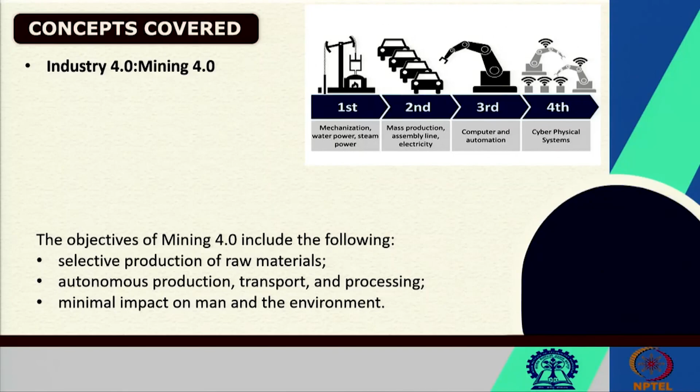Now when we talk about this Industry 4.0, which is a buzzword these days, everybody is talking about it, and I assume that as an engineering student you have already got sufficient information about what is this Industry 4.0. When we talk Industry 4.0, it is exactly an abbreviation, or in a form we are telling about Industrial Revolution 4.0. All of you know that the industrial revolution started with the introduction of the steam engine about 200 years ago.

After the development of the steam engine, mechanization came and many operations started getting mechanized, the first of which was the textile industry. Then the industrial revolution came to Europe, and then to all English and Europe dominated other countries.

After that, Industrial Revolution 2 came with the introduction of electricity, electrical power, and electrical drive, and with that electrical drive, this industrial revolution brought mass production.

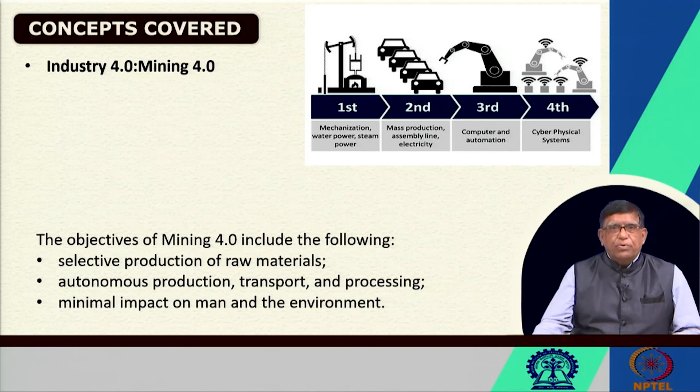Industry 4.0 is already operating in our production systems, our machinery maintenance system, our automation in transport and processing, and the impact of man and our environment by mining can be reduced by incorporation of this Industry 4.0 as mining 4.0. Today, mining 4.0 involves a lot of mining automation.

This mining is exactly now where it is operations for managing a different type of supply chain, from the raw materials to the mining industry, to the supply of the product to different industries, and then the transportation system, getting the explosives to blast. Then it requires a lot of unit operations in mining. Those who are studying mining engineering know that there are different unit operations, but for better control we require securely visualizing the whole enterprise and its operations.

Now when you want all these operations monitored and brought together to a control room, there come the applications of information technology, communication engineering, and data; data analysis becomes part and parcel of modern mining, and that is where your Industry 4.0 mining automation comes in. So in this lecture I will not be telling you the technology involved in Industry 4.0, but, from a user's perspective, what exactly you should know.

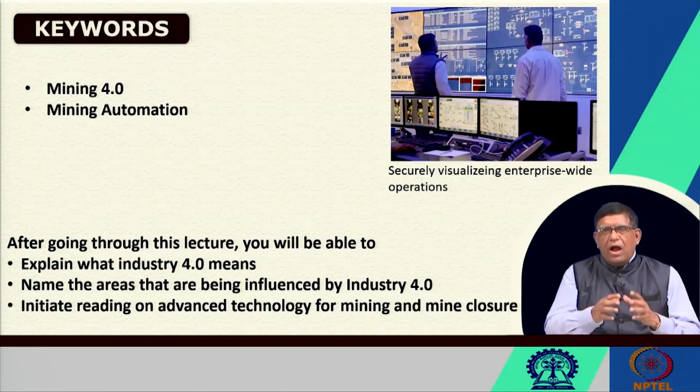So you should be able to name at least the areas that are being influenced by Industry 4.0 in mining, and you should start reading on advanced technology for mining and mine closure. That is the objective of this, so that you develop an interest, since this particular area will be transforming our mining industry and mine closure operations. So what is Industry 4.0? I have already told you; now a little bit more on it.

It is a cyber physical system. What is a cyber physical system? It is particularly where automation is brought in, where different physical things are remotely connected, they can communicate amongst themselves, and they have the Internet of Things to start the control by taking decisions by themselves.

So this cyber physical system works with a lot of sensors, and they are interpreting the data. By using artificial intelligence, decision making becomes inbuilt, so that it can actuate different controlling functions, and those functions can be self-optimized, self-configured, self-diagnostic. If a system is running, there could be a problem. Before the problem comes, the data collected by different sensors is analyzed by the inbuilt intelligence, or intelligence which is continuously formed, and after that it will control the operations.

And for doing that, nowadays a lot of other associated technologies are being introduced, like drones, which are making all our remote sensing tools more productive. With the use of drones, we can do the total mine mapping very quickly, 3D imaging, and then advanced engineering and robotics. These are being incorporated.

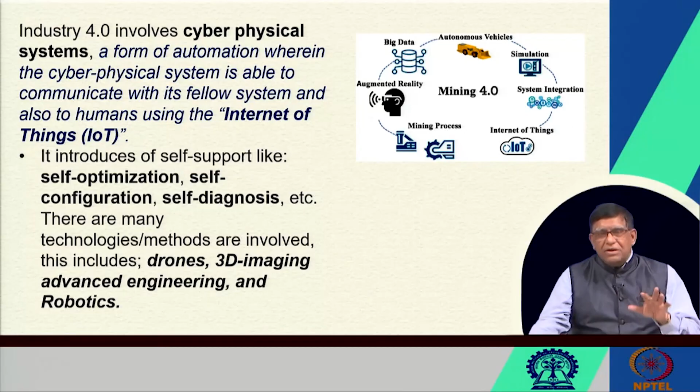You may be hearing some terms like digital twin. When it is maintaining things, we can create a digital twin on the screen, and then for whatever the operations, the expert can be sitting over here, and only one operator or a robot will be there; their controlling knob can be operated from the operator's table. That type of thing has already been brought in, and it will be integrated into a system with the Internet of Things. Then overall everything will be transforming the mining process, and when we do the mining like that, we will be talking about how closure also will take place.

In Sweden, they have done a lot of work. You know that Sweden is famous for the Kiruna underground mines. Near the mines, you may know the Luleå University. At Luleå University, Professor Galler and Professor Uday Kumar have been doing a lot of work on this. They have made a roadmap for the Swedish mining sector, where there will be robotized mining, autonomous mining, mechanized mining and remote production, and how it will be transforming from manual mining.

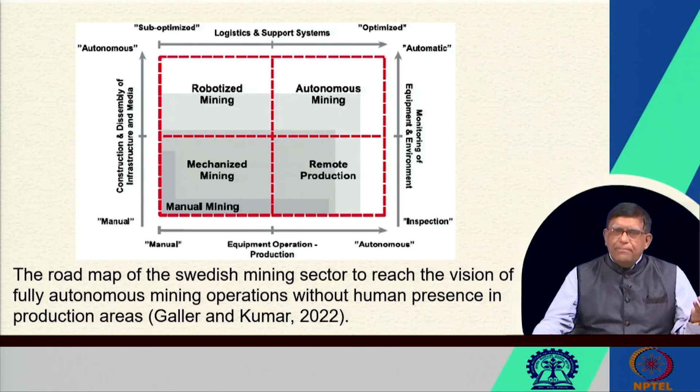At present, wherever we are doing manual mining, many things are manual and sub-optimized, and those sub-optimized manual operations, when going to autonomous with digital technology, will go to an optimized system. In the optimized system, when you go automatic, your equipment and the environment, everything will be inspected, controlled, and operated for the best productivity and safer operations. That is the vision. So when we talk about Mining 4.0, to go from there to the fifth generation, there will be a lot of areas.

There will have to be machine-to-machine communications. Without an operator, the shovel will be working. Without an operator, the dumper will be working. When the excavator is excavating, it will communicate with the dumper through different types of gadgets and information flow. You will know in which position exactly the dumper has to stand, so that it takes the minimum time to load there. So it is not only the loading, it will also be controlling the cycle time.

That's why with machine-to-machine communication in mining, different unit operations will be done in a sequence. Some work will be sequential, some work will be parallel. The parallel and sequential operations will be optimized through this machine-to-machine communication, which will use locational information from GPS, the global positioning system, and transmissions using radio frequency, so information will go from one machine to another. Every machine will have its transmitter and receiving sections.

A communication network will take place, and within the machines many sensors will tell whether the fuel system is working okay, the braking system is working okay, the steering system is working okay. If any untoward incident takes place, the warning will go, not only machine to machine, but also to the control room. And that has been done with ruggedized sensors. In the mining environment, with temperature, dust, water, all that, the sensors have to work, and that's why developments in instrumentation, electronics and mechatronics will be used in those sensors, and the data collected will have to be analyzed using artificial intelligence.

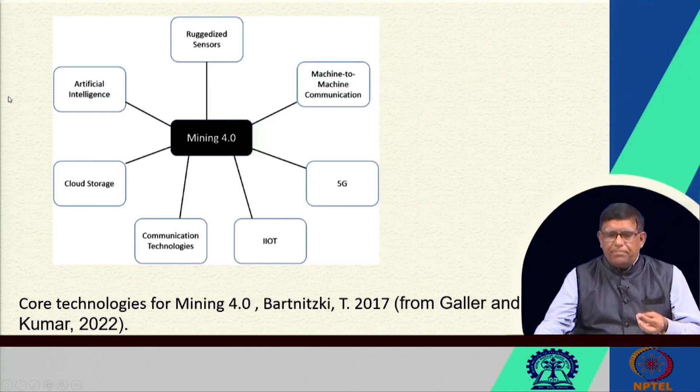You will be using cloud, so how the information will be communicated and shared, that data informatics will be used over here. And this ICT, that is the information technology and the communication technology, is the main thing by which your industrial Internet of Things will be coming up. And when this is put, then our whole operation takes place.

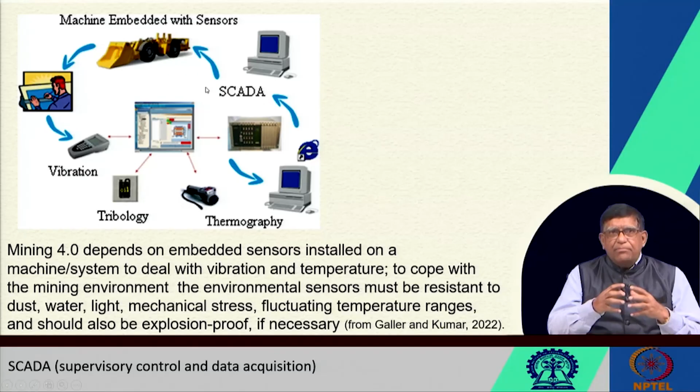Now once you know about this, then there will be machine embedded sensors, and this supervisory control and data acquisition, SCADA, is another thing which revolutionized our industry 3.0 to industry 4.0. During this transition period, the SCADA system of software and hardware made a lot of differences. And in mining, in a number of problems, and in the maintenance sectors, vibration, tribology, thermography, all these things are put there, and then these embedded sensors are used for controlling the whole operations.

So basically, when you are going towards industry 4.0 in mining, we know what field instrumentation is required, what field controllers are required, how the human machine interface will be there, and from the human machine interface, how the machine to machine interface will be developed, and then the network connectivity, whether we are doing it by direct connections or by remote connections, by wireless connections, then how this information is archived, where it is put, how it is processed, all these things will be taken up.

So if any one of you is interested, if you have got a knack to learn these things, you should start doing a few small activities. Don't think of going one day to industry 5.0. For that, at least sit with your electronics gadgets and electronic instrumentation, and start developing a few things.

At least try to see whether you can make the coffee making machines in your hostel remotely start operating when you put your bicycle in your cycle stand. It is a simple thing. You can easily instrument your coffee making machines, and then with your cycle stand, a number of friends together can put their room numbers there, and then the coffee maker, if it is there in your room, will start working.

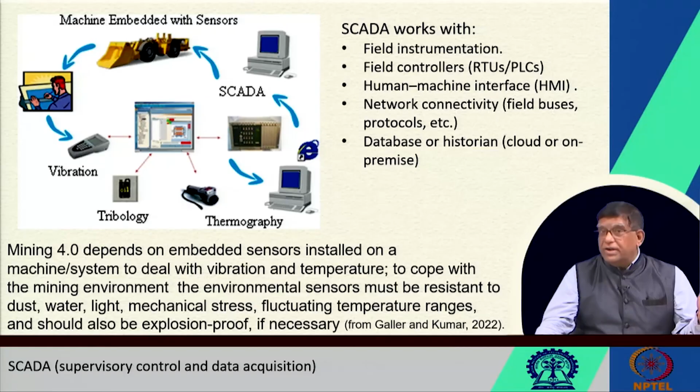Now this industry 4.0 technology for mining will be giving different types of things. I will not tell about what the biomechanical supports or different wearable things coming up today are, but as an example, if you have some wearable sensors on your body and you go into an underground mine, if there is no proper illumination, you can have infrared sensors to see things, so even in darkness you can get visibility, and you will be monitored from the surface wherever and whenever you are working.

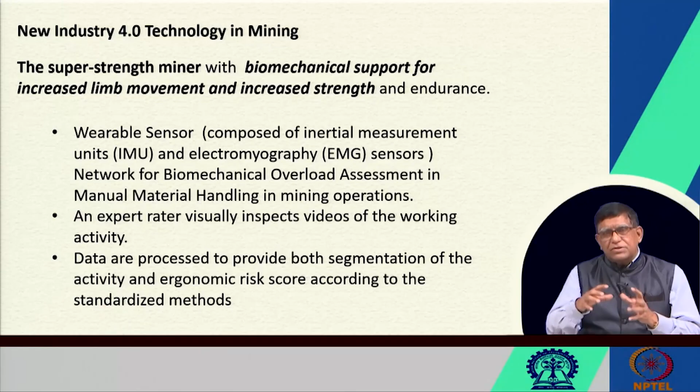Now suppose you want to lift certain machines and parts, at that time you can have additional arms which will give you extra strength. When you have to climb, say, a ladder in an underground mine in a very small space, you can have biomechanical supports on your legs so that your own ligaments and flesh are not getting tensed. So those types of devices can be there, and because of your wearable sensors and those gadgets, every location of the miner can be looked into.

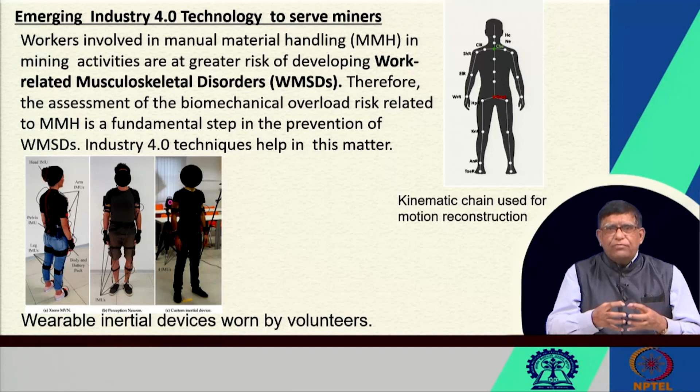So there is a lot of research going on in this. Miner safety is a very, very important thing, and miners can be monitored by putting sensors on their body, and from there a warning can be given if you are doing some wrong jobs and things like that. So these are some of the areas, sensor technology, health, biomechanics. These are going on, and they will have to be integrated for the mining operations. Whatever you do in mining operations can also be useful for your underground mine closure operations.

At the mine closing stage, your mining is done, you will have to take out the instruments and all that. At that time there is less ventilation, some of the area may not have been maintained for a long time, so there will be more risk. That's why you will have to get more automation over there. You cannot make many people go over there. If you are sending one person, make him fully gadgeted, so that he can give all the information.

At the same time he is safe, so that when he is approaching a gallery where there is methane gas, his wearable sensors will give a signal not to go beyond it, or it can automatically actuate the oxygen mask he is carrying. Say the underground oxygen has come down; the wearable gadgets will detect it, a mask may come up automatically, and he will start getting oxygen from the store he is carrying. Different things like that will be necessary when surveying a mine for closure.

So there will be an automated safety system. This is automation of safety, whatever I have said. It is a story I am telling, but you will have to imagine. Whatever new development and new technology comes, what you have studied in basic electronics, basic electrical engineering and basic mechanical engineering is enough. After that it is your job. You only need to imagine, just like J.K. Rowling imagines Harry Potter.

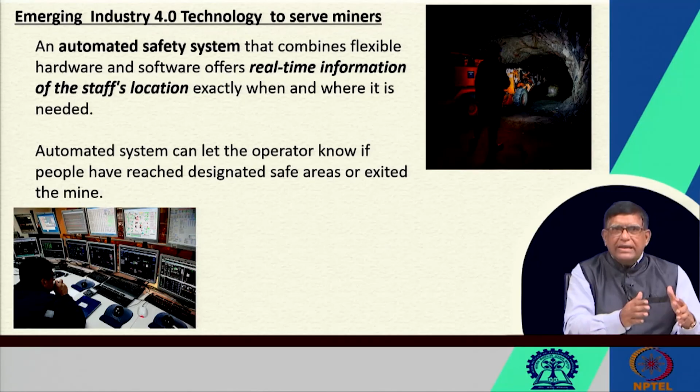Unfortunately, you are not getting exposed to that. But under the new education policy, every mining engineering department will have to have such laboratories, and for that DIY has started. If you have missed it because you are not in the new curriculum, start working with your first year colleagues who have just joined. They are doing DIY; join them, so that in the near future we can develop such laboratories in our departments.

So new Industry 4.0 technology in mining will make life easier, whether for closing or producing. In the heavy machinery erection yard, a lot of new mining activity gets delayed because procured machines do not get erected in time. There exactly Industry 4.0 will help. Similarly, demolition of the mine, where there are a lot of hazards, can be robotized. It will save money. Wherever you can do the job faster, safer, with less manpower, you save money and do less environmental damage. Before the environment gets more damaged, you get system warnings and mitigate by automated means, so the environment is better protected.

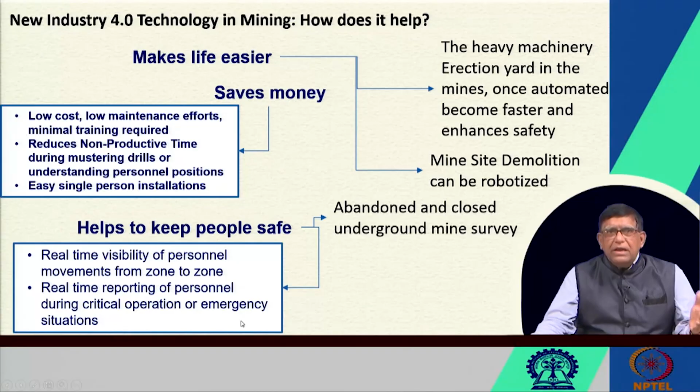And Industry 4.0 will keep you safe and enable you to work better, because wherever a person is, in underground or opencast mines, his location, his condition, everything is monitored, and someone at the top knows it. If you make any mistake, you will get a warning at the same time, so it will enable you to work better.

Similarly, it will give you the information, that is the power, that data when they are collected and then analyzed, and that quickly it is becoming information. How quickly you can convert data into information, then you will be getting powered. So the data analytics people, they do not know what information you require for your area, your industry, your technology. So that is where the power is.

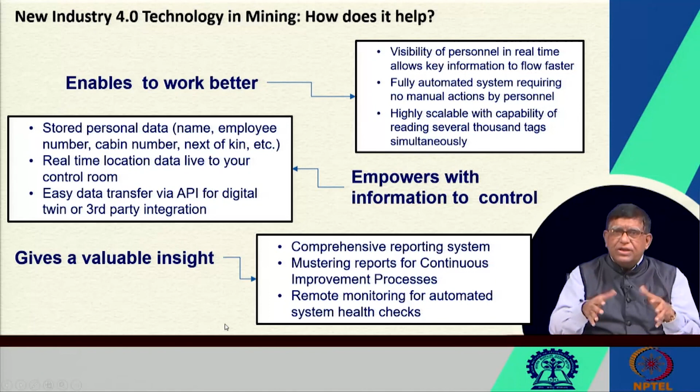Only doing data analysis will not help you. So that's why try to get how that information can be made for your work, and that will be giving you a valuable insight into the system, how your whole mining operations are taking place. Once you know, for closure operations, you know that a lot of leveling work is there. So we always tell that the first machine to go in a mine operation is the dozer, and the last machine to come out after closing is also the dozer.

Now the dozer has been exactly part of this digitalization, and the automated dozer came about more than 15 years ago, when the remotely controlled dozer operator started working. It first came as remote operated machines, but today not only remote control, it is giving tele-operations, and fully automated functions can be done at the same time.

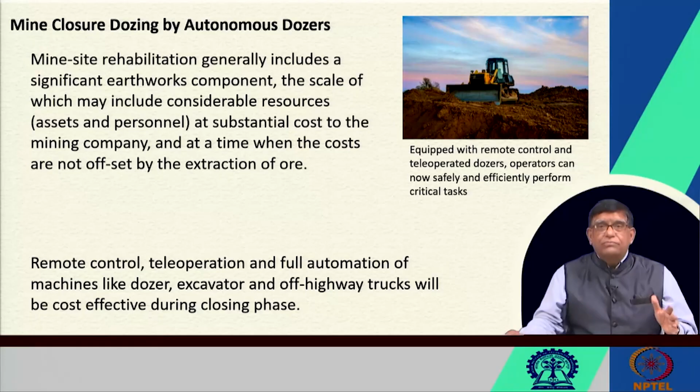When artificial intelligence and machine learning have been incorporated into the dozer, it can decide where to go, which direction it should go, what it can optimize. A dozer can be dozing in the same directions, or at what angle it will be turning. All these things can be optimized by getting the data at that spot itself, and then processing it and getting the information, getting the direction. So to that end, you will have to do a lot of study on this dozer operation itself.

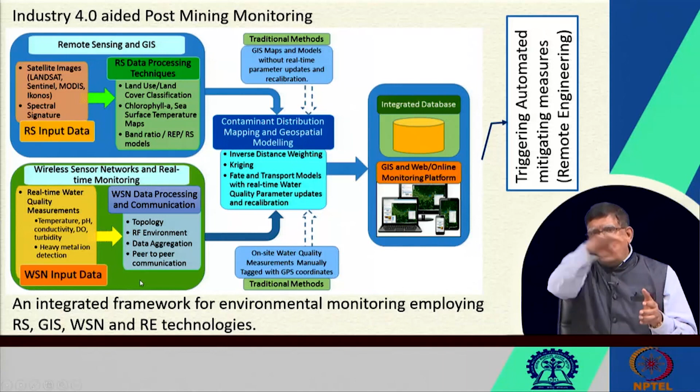So Industry 4.0 for post-mining monitoring will have to give that remote sensing, and GIS will be playing a big role, and from there we will have to know the whole total area, how the degradation has taken place, and then depending on the degradation you will be planning out what operations you will be doing. And then wireless sensor network,

because different water bodies, different air pollution, different dust concentrations, the people movement, and any toxic things coming out of it, all these things are getting sensed, and then a wireless sensor network will be giving these things, and they will be developing where the contamination is distributed, doing geospatial modeling in GIS,

and from there your water quality, how it will have to be, where the plantations will have to be, which tree in which plantation area, when the water will have to be sprayed, when the fertilizer will be coming, all these things can be controlled, and then that will be there in an integrated database.

When we have done this monitoring part, it will trigger automatic mitigating measures, and by that this new remote engineering approach will be coming. So this is the new terminology I am telling you, remote engineering. You might have done distance education, online education; now many engineers are joining many companies as remote engineers for maintenance jobs.

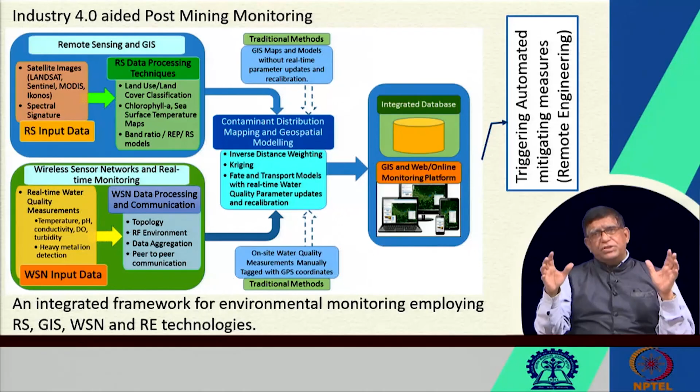In a big maintenance job, the maintenance engineer may be a remote engineer. From remote he will be looking into the systems; an expert engineer will be remotely operating, and he will have a digital twin. On the digital twin he will see, and he will have control through the telephone network, the internet network, with direct information from the persons working over there, and then as an expert, the remote engineering will be done. The remote monitoring is coming over there.

Nowadays we need not go from Delhi to the CPWD road if it is being done somewhere near Talcher, and from Delhi only the CPWD persons can see whether the road surface, the base, sub-base and the surfacing layer, the width, the crown of the road is maintained or not. The engineer need not come to inspect, but he will be looking at it from there. At the same time, whatever the conditions are will be recorded, so that the engineer cannot take some additional money or extra treatment to say that this road is okay.

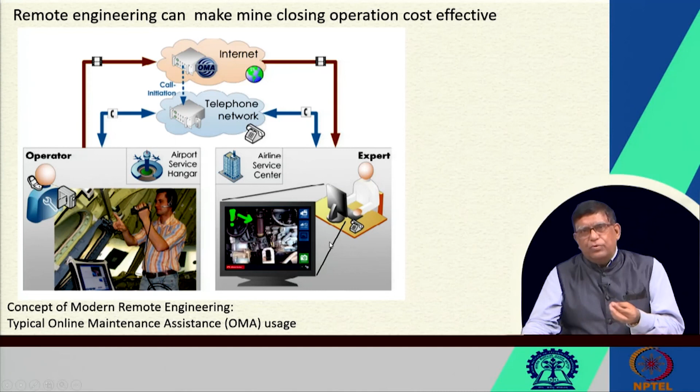So that type of remote engineering, and by this our technology-enabled things are coming up. You will have to think, as an engineer, your engineering knowledge will have to be technically empowered. For that you will have to look into how remote engineering in your demolishing work can be done. There had been a lot of demolitions.

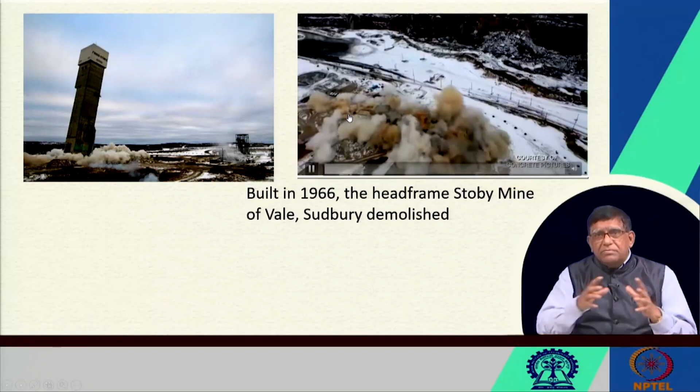For example, this type of mine tower, that is your mine winder, was there and that was to be demolished. For that job, before closing the whole area and making a post mining land use plan, a lot of information will be necessary.

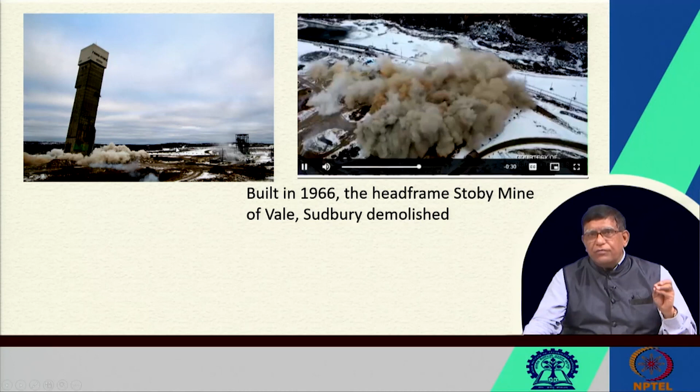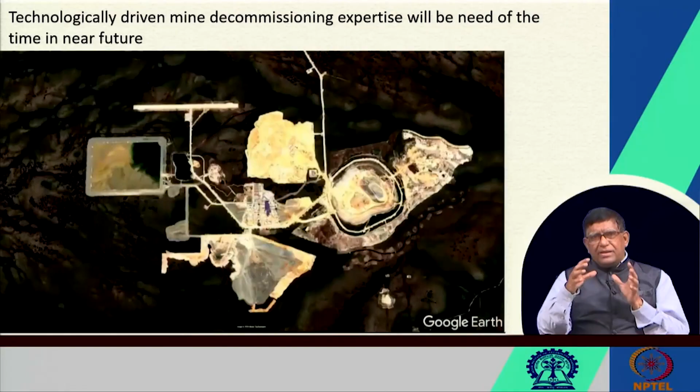You can see some of the things here, as one of the mines, how this was a diamond mine. They were in a very remote area, and in that remote area this mine was doing a lot of very good business. Now the diamond has been no more coming, so it is to be closed.

You can see that during the operations of the mining, what type of infrastructure develops, such type of buildings, such type of things over there. But if you are in a very remote area, you cannot get all these things brought in, but the thing is that they will have to be demolished.

In this area, because they have taken it from, say, forest land, it will have to be returned to the forest land. Or if it is to be shown otherwise, then for demolishing they will have to bring the machines and all from a place to that remote area.

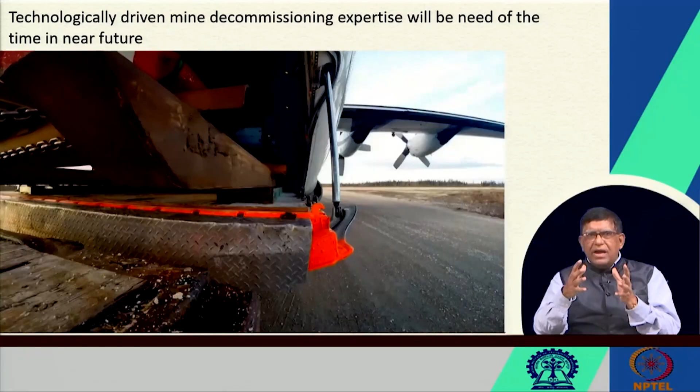Again, the way they built it up, that same way it will be brought again. These whole machines are to be brought into this remote area from another area by airlift. The huge cranes, huge machines are airlifted, and that airlifted machinery is placed into the mines for the demolition activities.

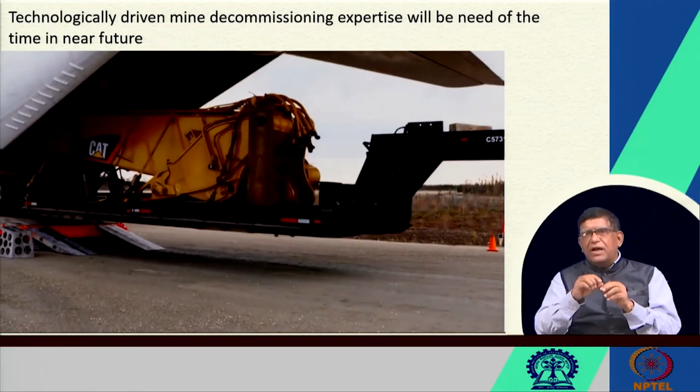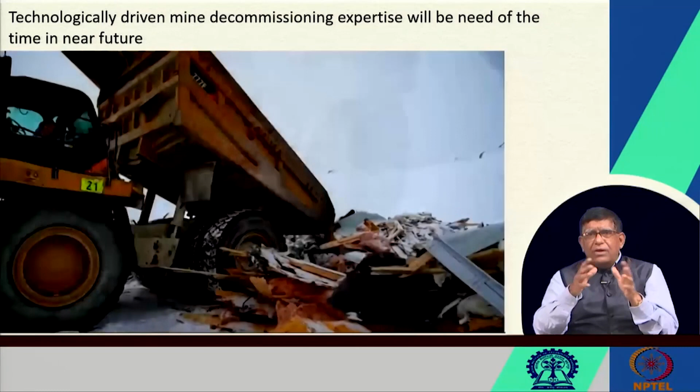So you can see over here how, after bringing it in, they start breaking down the structures, and then the material is brought in and kept, so that the structures are demolished mechanically.

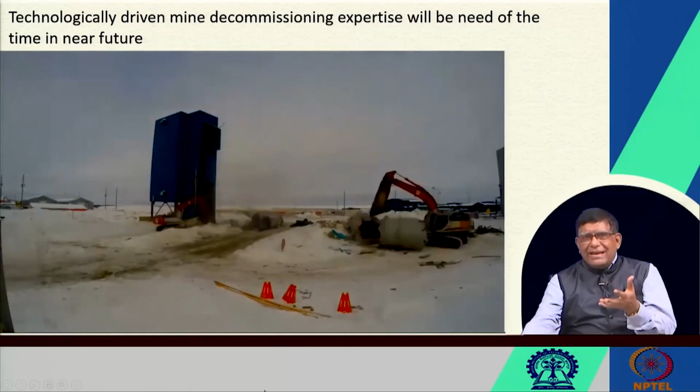Some of them can be done with blasting. You have seen recently the Twin Tower demolitions. Similarly, in a mining area, when the mining is over, many structures will be demolished.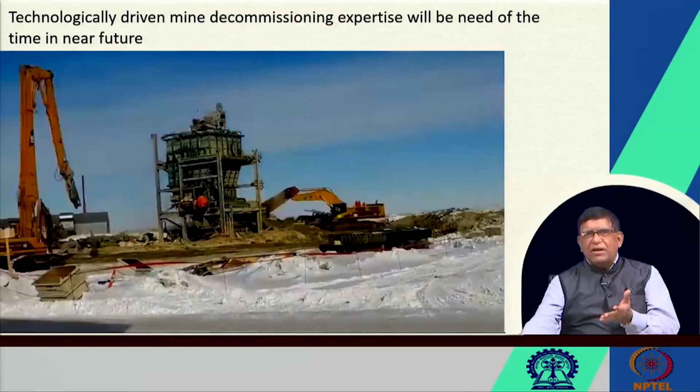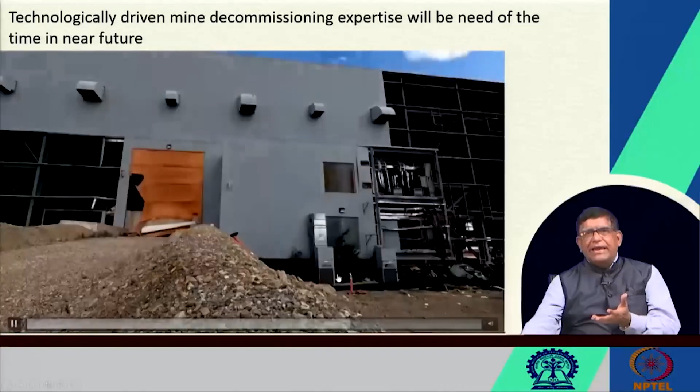Many engineers have started doing this demolition blasting, but also demolitions by mechanical means. You can see here how the structures are totally broken down, and then that area which used to be an active mining area with a lot of processing plants and all, gets totally removed, all its infrastructure taken out, and then the area suddenly becomes full of debris.

Many of them just take it and classify the debris for recycling, and they recover certain money from there. But ultimately the area becomes vacant, and they go away again to where they came from. The airlift takes away all the machines, the people go, and that area is left as a mining area.

So you have seen that closure requires deployment of technology, a lot of things are yet to be done. You need to know, in this course it's a general overall idea I have been trying to give you, that mine closure, or any other business closure, you will have to use technology. In this lecture I have given a brief introduction of how technology is going to change mine closing activities in the future.

While defining mine closure activities and the technology involved, it is now essential to explore how advanced digital technology, remote sensing and GIS, with different tools, and remote engineering automation, will assist in future. Your digital information sharing is a must, so that our environment ultimately can be created. The post mining site must again be environmentally supportive of our work.

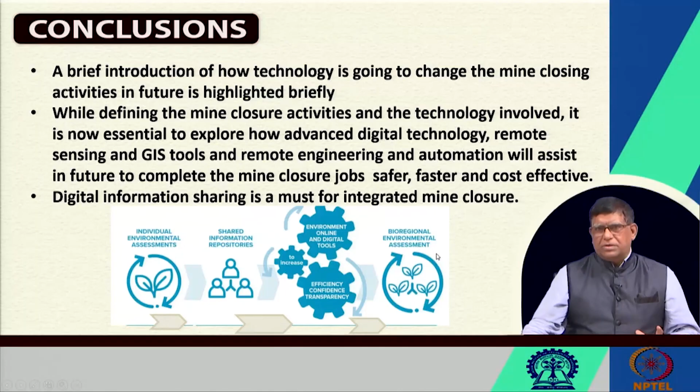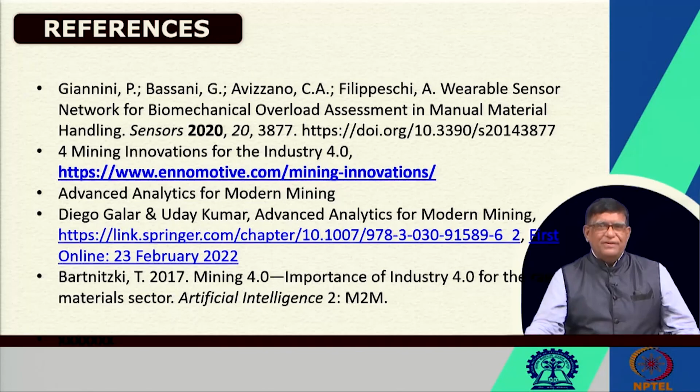There are a lot of resources available nowadays because of the internet. You know everything, all things are there, but as long as the knowledge is just in the pages of books, it does nothing. So don't just go on reading things. Read one or two and start doing some small things yourself. Take up learning activity, and only then will you be able to develop your expertise, maybe as a remote engineer, a field engineer, or a works manager. The world is for you. Thank you.